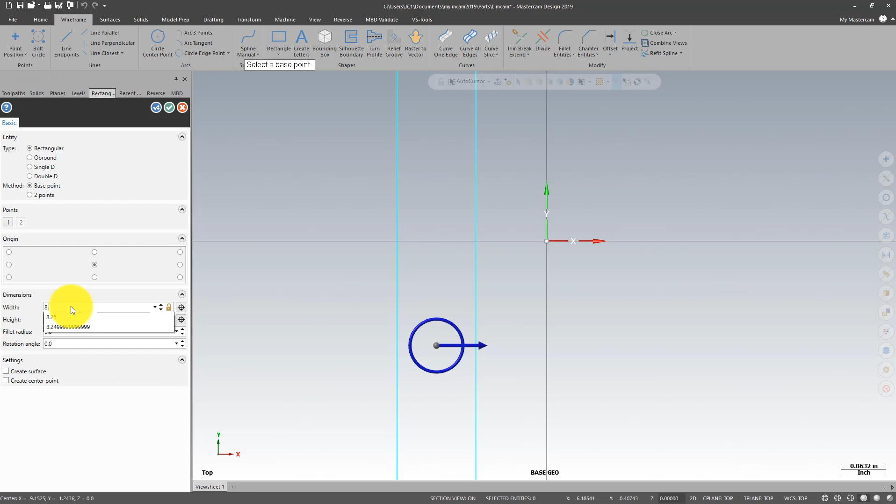So I'm gonna start my geometry on a top plane, and I'm gonna create a rectangle. So wireframe, rectangular shape. I want it right on the center, and then the height, I can copy the dimension. Remember, I copy, I'm just gonna paste the dimension here, and then this one right here would be 8.250. Just grab it, put it in the center. I want this one to have a 3/4 of an inch radius.

I'm gonna pause it right here a little bit. Okay, I'm gonna accept it. But for you guys that don't want to change your configuration to inches, you can go to metric, and I can do the same thing here. Rectangle, same thing, right there. And now the height over here, I'm gonna Control V, and when you get the dimension, just type in IN, and it has to be in lowercase letters, and there it is. So this one right here is 8.250 IN, and Mastercam will do the math for you, so you don't have to change your configuration to inches if you don't want to.

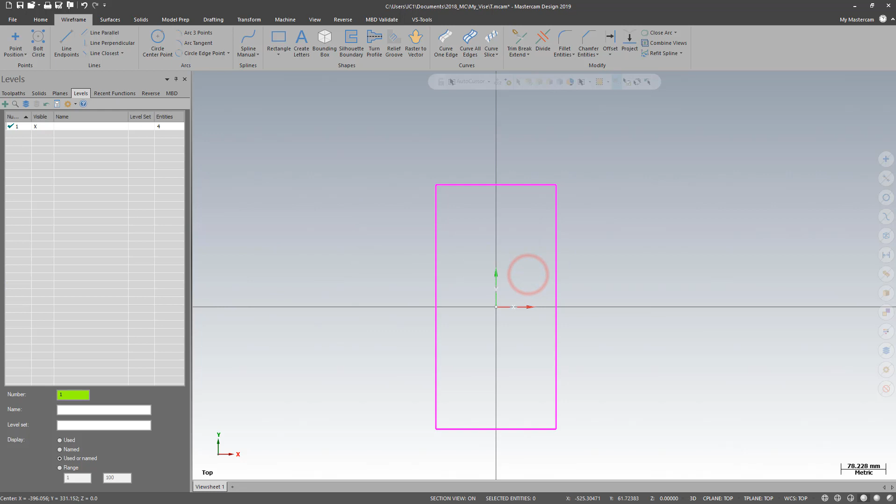The other option that you guys have is you can create your vise in inches and then just bring it and drop it. I have one that I already created. It's a different one. I'm just gonna drop it here. Cancel. I'm just gonna drop it right here, and it asks if I want to scale it, you say no, and it will bring it in. Let's say at the end of the video you create in inches, just bring it into a metric file, and there it is. You say yes, and there it is.

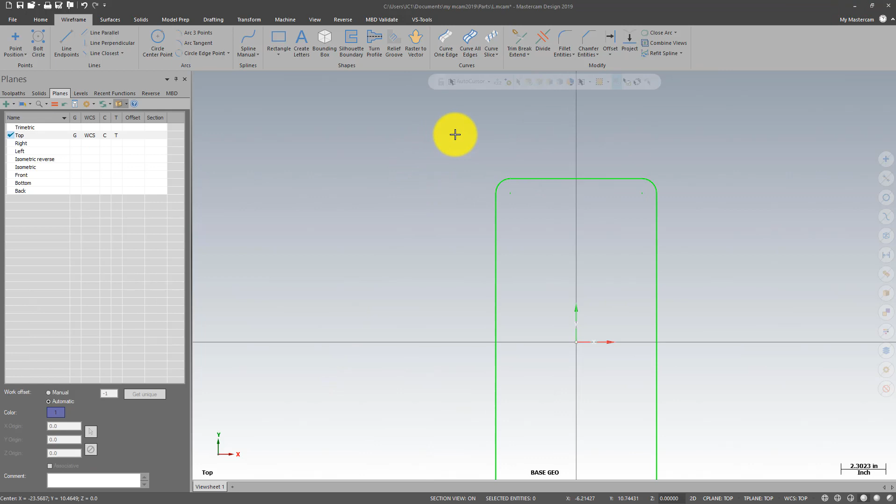So let's go back to our file right here. We already created a rectangle, and this is gonna be our base. So I'm gonna go to levels, and I'm gonna create the first solid. So I go to solid, extrude, doesn't matter where you pick. Just make sure the arrow is going up, and I'm gonna go here with 1/2 inch up. I will say yes. See? Okay, so I'm missing something. I did it on purpose, so you can see that you can make changes to the geometry. You don't have to redo the solid.

So here's the levels. I'm going back to base geometry. I'm gonna turn everything off. I'm gonna be doing a lot of geometry from this dimension, which is dimension T. So I'm just gonna copy. I'm gonna offset this one. So transform, offset entity. I want this one, and the distance will be paste, which is dimension T. Right there. There it is.

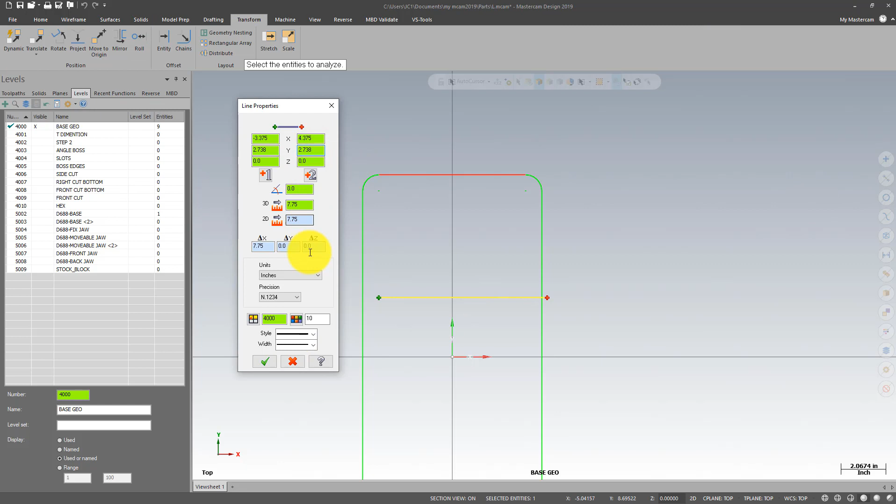What I'm gonna do now is change the properties on this one with F4 right here. This one right here is 8.750 divided by 2. Then I want to change the style to this, just for video purposes. And I'm going to change the color too. I'm going to clear, and there it is.

Well, also on this one, I want to change it to a different level right here. I'm using two monitors. I want that one. Using two monitors, so the box appears on the other monitor. So we're fine right now.

Now what I'm gonna do is, still on that level, we're gonna create a line from this point, and then type in L, and this is gonna be the length. The total length of the line is 0.938 divided by 2, because I'm just gonna do half, and then I'm gonna mirror. And then here I want another line. Type in A for an angle. The angle is 110. The length, it doesn't matter. So it could be 1 inch. It doesn't matter. You just need to cross that line right there.

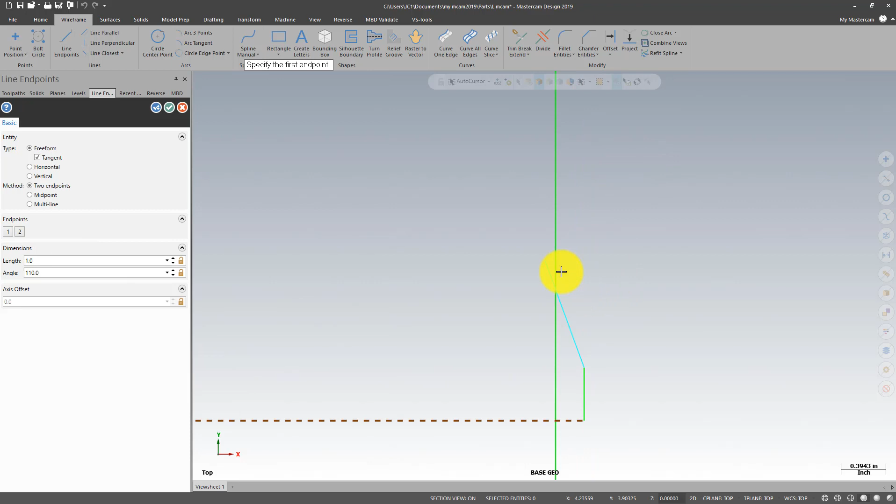So I say yes. And I want to do a transform, mirror. I want to mirror those two lines. And then here, I don't want it on X because X is right here. So I'm going to use a vector, and I'm going to pick up this vector. Now that I'm here, I'm going to mirror to the other side. I say yes. I pick up all of them. Now I want it on the Y, and there it is.

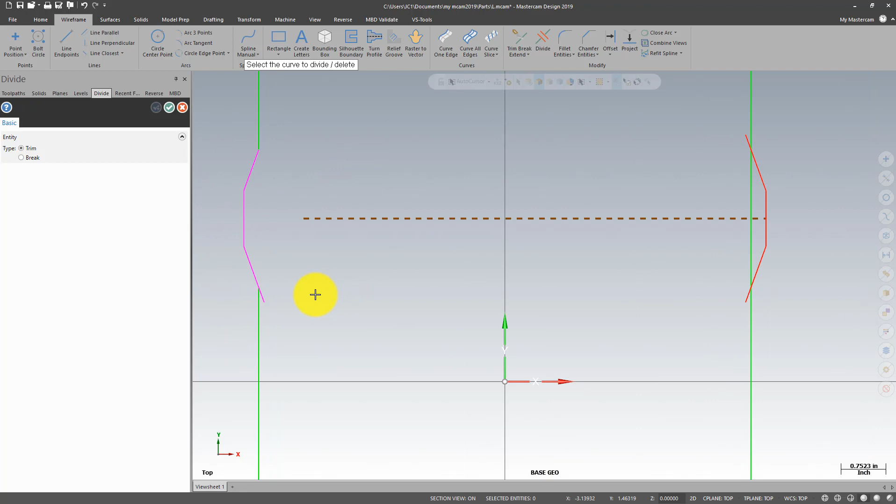From here, what we need to do is trim this. So we will wireframe, divide. Make sure you pick up the right stuff, because if you make a mistake, you pick up the line right there. So here, here, here, and here. So we don't have to rechange the solid. We go to solid, and we clear the dirty solid, and it's there, levels and base, and we're in business right there.

So what I'm going to do now is I'm going to change the color with an F4. Change the color of that to this one. Doesn't matter which color you pick. I want that color right there. So we're going to go to step number 2. We're going to change the level where I want to create my geometry. And you don't have to worry about the dimension, just coordinate of a point, and I want my geometry to be on top of this surface. So right there, it changed to a half an inch, and we're going to create another rectangle.

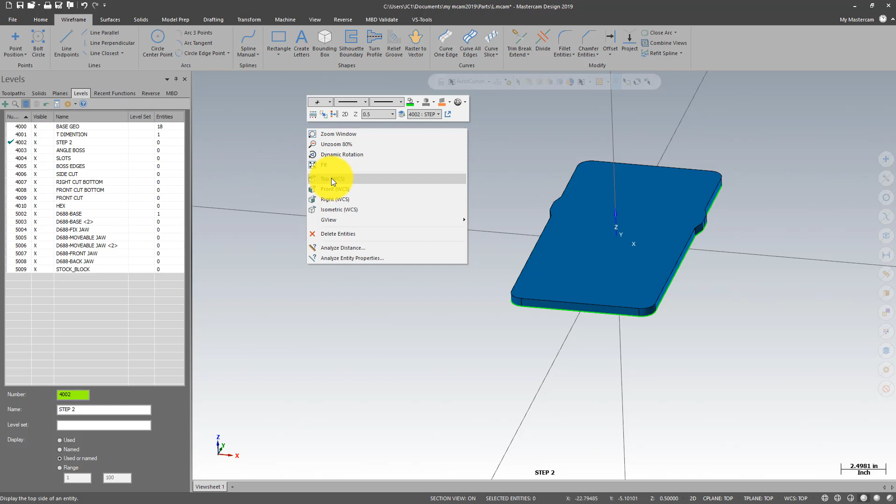So we go to view and then top view. We turn off all the levels. We only have that one on. We can change the color too if we want to. Let's go to blue. It doesn't matter, just to make the video a little bit easier to understand. So I want to create another rectangle, so I go rectangle shapes.

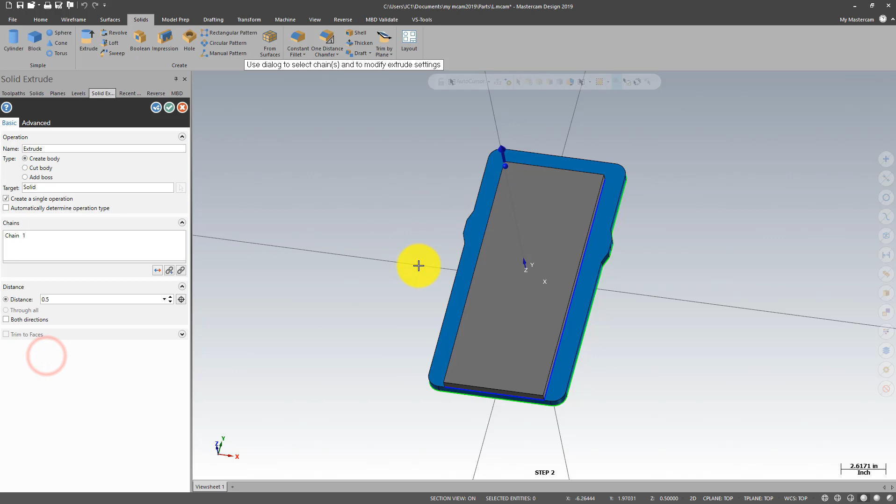See, on top of that, we go to solids, extrude the rectangle, and the length, it'll be 2 inches, 375. Accept that. What I'm gonna do is I'm gonna have both solids together. So we're gonna do Boolean Operation. What these red rectangles are telling you is you have to pick up the geometry. So as a target body, we're gonna use this one, and then the tool bodies, the ones that you want to add, is this. We say yes.

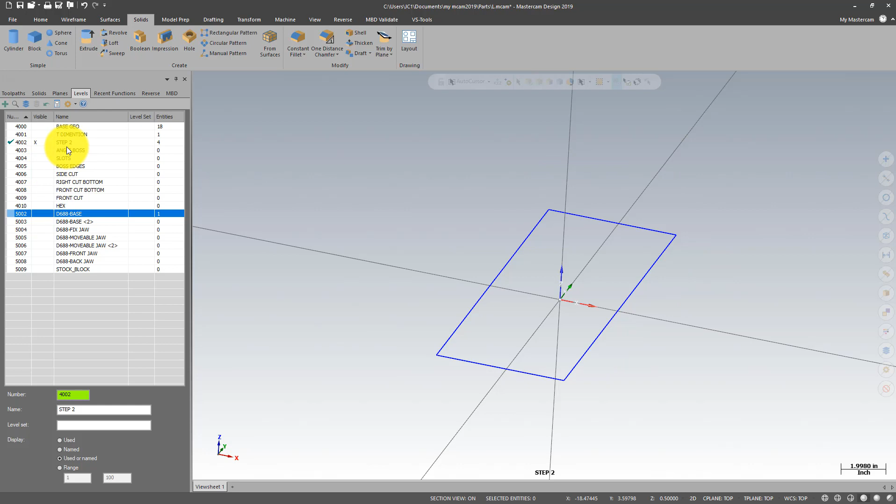See how everything is blue? I will say yes, and we can turn this one off. So even though we did the solid on this level, just change all the attributes to the other level. So we're fine right now. So now let's go to the next step. So we're gonna pick up the next level.

We can go here, top, and we're gonna do what we did on the other one, but this time just the angle is a little bit different. So wireframe, line from the middle here, there, and then we want an angle. So we can go to levels, turn the solid off, and then go back to the line. The angle is going to be 135, and the length, it doesn't matter.

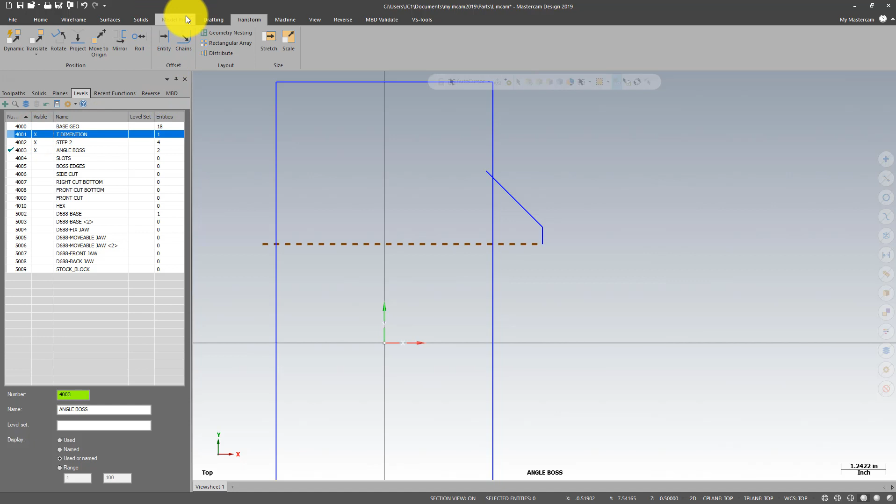So what we're going to do is same thing, transform and mirror. We need this one on, so we can use it as a vector. Mirror this and this, and we want to use a vector, that one right there. Wireframe, and then put them together. But we can trim it and use this, but it doesn't matter. Now we're gonna go back to transform and then mirror. And now we want this one right here.

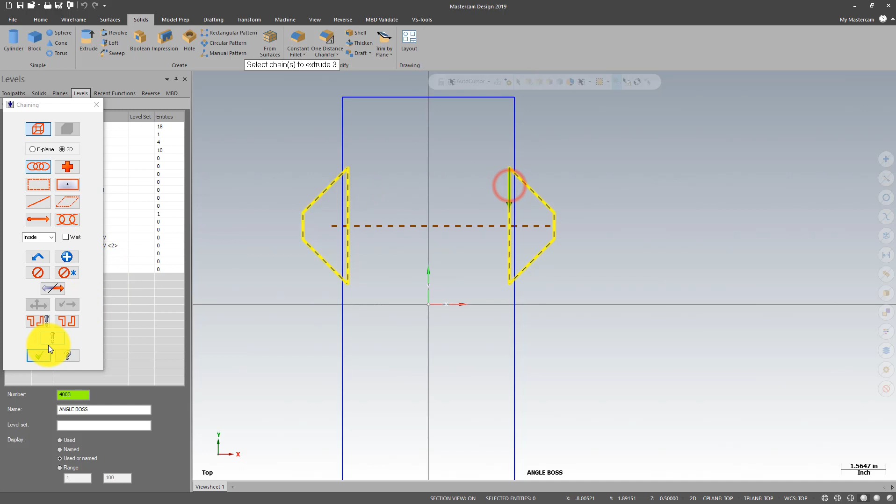We go to solids and extrude the solids. Doesn't matter where you pick. Just make sure your line is going up, and then only 1/4 of an inch up. We accept that, and then we can turn on the base. Sorry, the base right there. So we have them right here. So we do the same. Put them together, the target body, that one, and then this one, put them together so they pick up. If we turn it off right there, clear, and then the base right there.

Now I want to go to the next step, and next step still in the same place, but we're going to create the slots. So we can go here, top. We need this one right here. Let me bring the table. So I need this dimension S and U.

Copy. And then the U dimension is going to be 656. So what I'm going to do here is create a wireframe circle, doesn't matter where. I'm gonna do a different way.

F4, and then the X is gonna be paste, or we just paste it. The Y is gonna be the coordinate of a point right there, and then the diameter will be 0.656. That was the U dimension. Should be right there. What we need to do is just create lines.

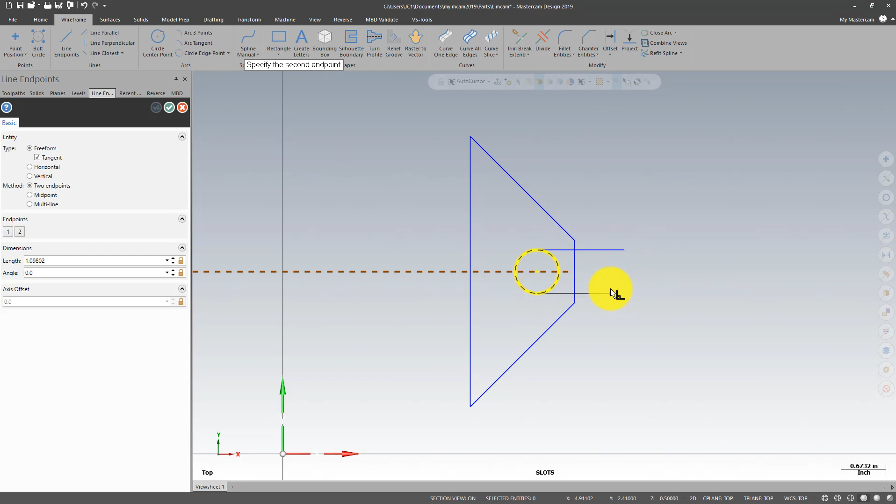Straight lines, just doesn't matter where. You go here, here, divide, just grab the mouse, don't let it go, and automatically we'll do it. Oh, I forgot, sorry about that. We need to trim those two. Say okay, and we're in business.

So now what we need to do is this geometry here with the list, and then transform and mirror to the other side, because it already knows that it's on a Y. We're fine. In order for us, now what we need to do is cut the solid. But in order for you to cut the solid, it has to be visible. If not, it won't do it.

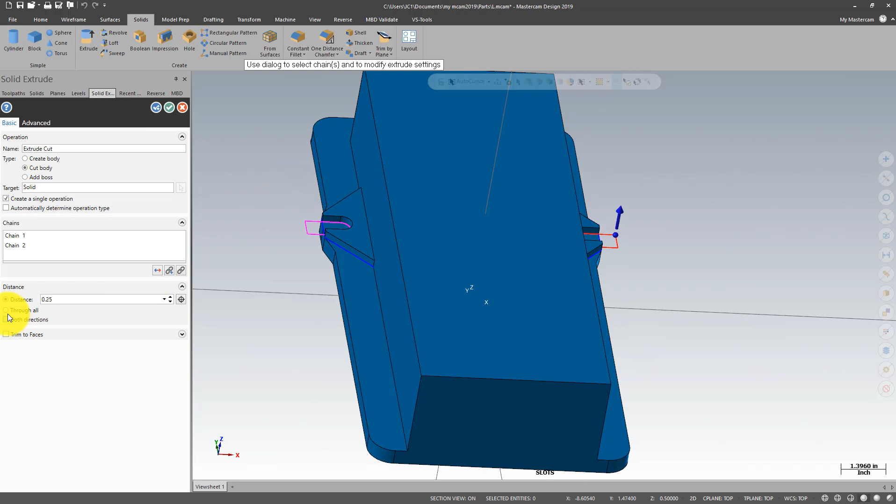And then we'll go solids, extrude, pick up that one and the other one. See, it's creating a solid, but we don't want that. We want to cut the solid. And now I want to do through all, and I want to do in both directions. See right there? So we select yes, isometric view, and we're making progress.

So we're gonna go to the next step, wireframe, and then curve one edge, and go here, here, and here. Doesn't matter which the order, you can pick up any. So we're in business right there. And I'm gonna isometric view again.

And create the lines here too. I forgot about these ones. See right now, because I'm on 2D, it created the lines right here. So what I'm gonna do is Control Z, right there. We can go to 3D real quick.

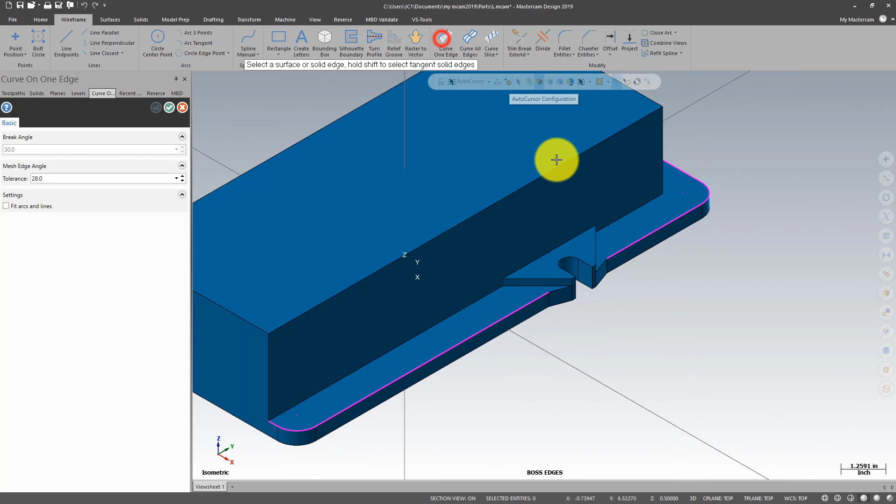And we go here, here, and here, and we do the same thing here, isometric view again. So what I'm gonna do now is trim those right there. So what I'm gonna do is go back to 2D. I'm gonna turn on this one.

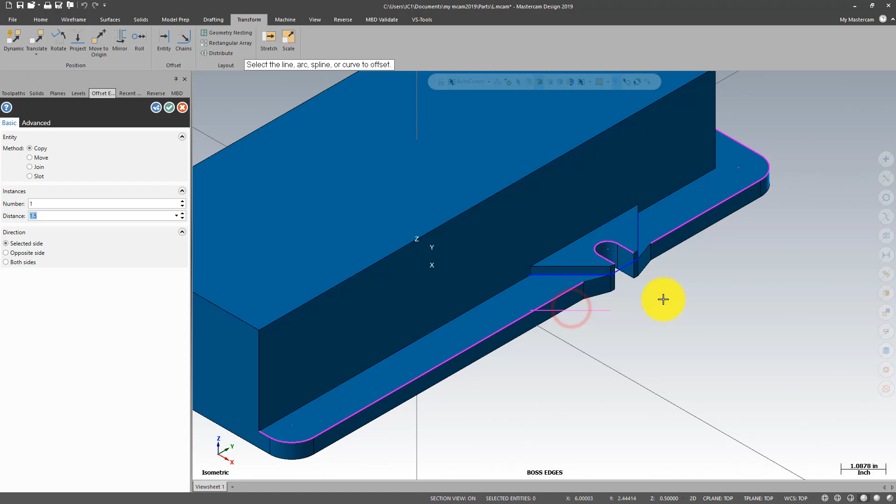I'm gonna do a transform, and then I'm gonna offset. The offset distance is 1.5 inches. Pick up that, we're fine. And then we have this one and this, and then we have this and that.

So we're fine. We can turn off this one right here. Go to the top. We can also turn off that one. Alright, sorry, we have to trim these lines right here. So wireframe, delete.

And then delete those lines. We don't need them anymore. You can delete it or blank it, or I'm just gonna delete them. We can blank them if we want to. Okay, so turn on the base solid again, and we're gonna create solids on those lines right here.

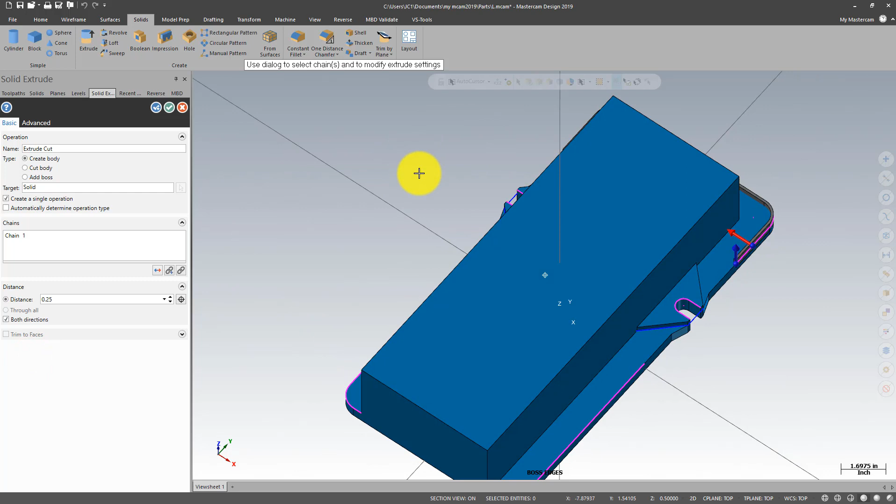So we go to solid, extrude, select only that. We're gonna do the whole thing, but we can add it later. See those lines right here? One is going up, the other one is inside. If they're going inside, I mean, if this one goes outside or down, you have to switch.

So right here I want 250. I don't want both directions, just one direction, 250. And then create body. Then we'll go to advanced, and we have direction 1 and direction 2. I don't want direction 2 because it's pointing out. I want direction 1, and I want it to be 250.

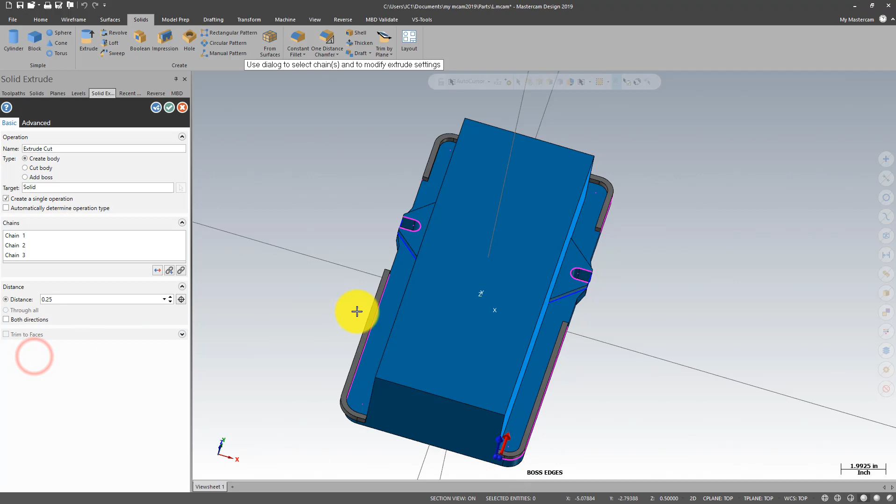So there it is. Then we'll go back to basic, and we're gonna add more, change. We change that one and add chain, and we change that one. So see how this one is inside and this one is to the outside. What we're gonna do is delete that one, or remove, and then add a chain, go from this side, and it will do it. It'll be easier than changing this and that.

So we're fine. Now what we're gonna do is add those to the solid. So same thing, the main is this, and then the body that I want is that, and that one right there. So we're fine.

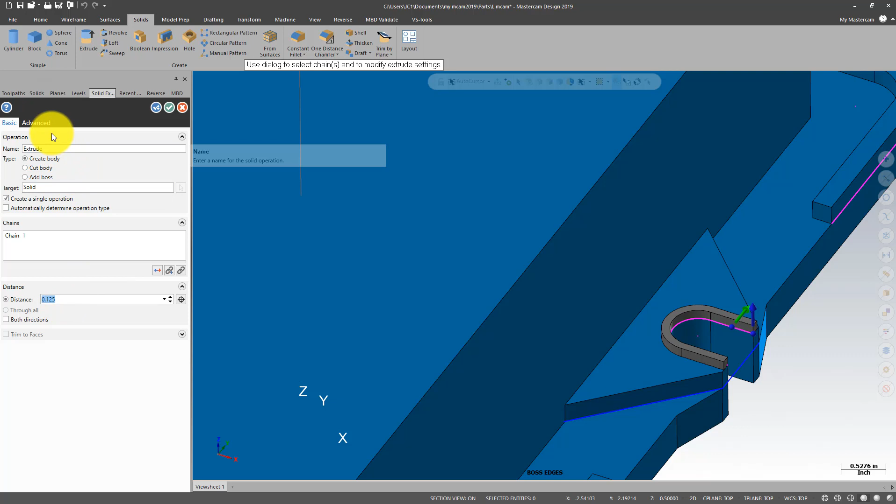So now what we're gonna do is create a solid on this one, extrude, pick up that. The arrow is out and this one is up, 125. We go to advanced, and direction 2, we want it up 0.125 also. We go to basic, we say yes, and then we go to the other side and we do the same thing.

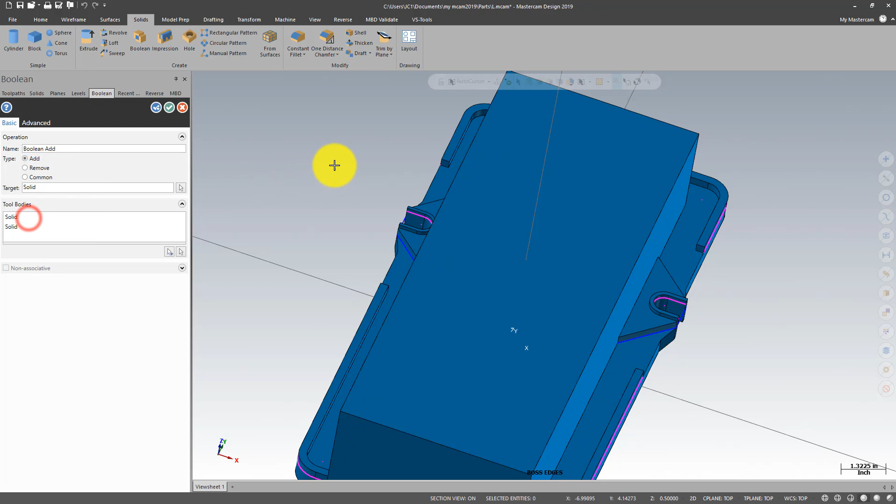The direction is from, well, we're going to go to advanced and then direction 1, and that's what I want. We're in business. So now same thing, we're going to put them together. Here we pick up the solid, and then here pick up that, and they change the color and everything.

I'm going to go to the next step, and I'm going to make a cut right here, so side cut right here. What I'm going to do is turn off the solid. I'm going to change my color just to make the video more fun.

Also, I'm going to change my plane. I'm going to be working on the right plane. And then select view and go to top. Right here, I want my Z to be 0. I'm going to create the geometry right on the center of the plane.

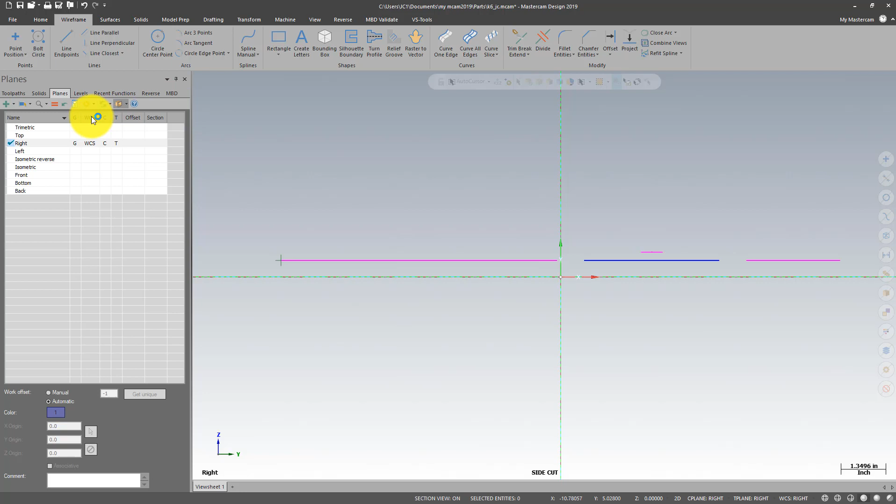So what I'm going to do here is something different. I know that the dimension from here to here is 1.5, but because I don't know exactly and I don't want to do the math, I just go here, create a point right there. I can go to levels and turn everything off.

Right here. So what I'm going to do is transform and translate my point right here 1.5 inches. I select yes, and there it is.

I'm going to create a rectangle, wireframe, rectangular shapes. I want to go right there, here on this corner, and then the width will be 3 inches, and the height will be 3/4 of an inch, 750, right there. I'm going to create fillet, trim edges, half an inch, and...

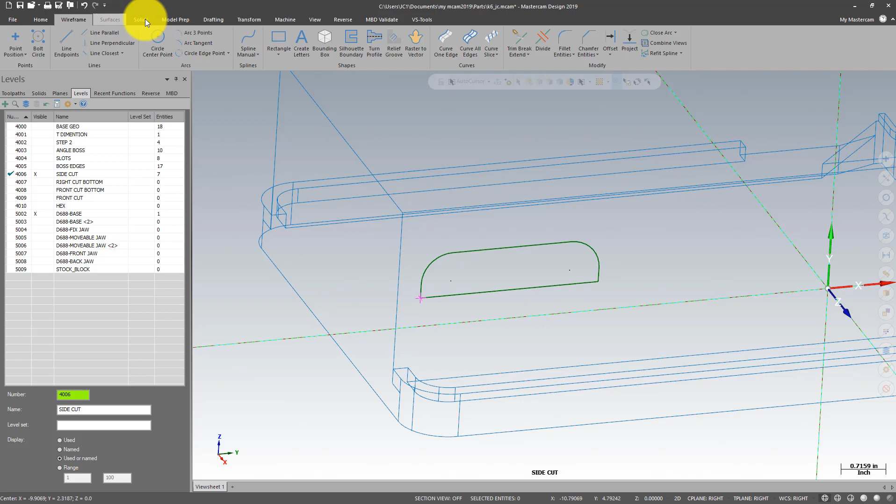We're in business. So now I'm going to cut the solid. In order for me to cut the solid, I had to turn it on, otherwise I won't do it. I'm going to do translucent or in solid, extrude, pick up that, doesn't matter which direction. The distance will be 3 inches. If I go through all, it will cut into this, and I don't want to do that. So it's just distance of 3 inches. Could be a little bit more than 3 inches, no problem. Go to both directions, and there it is.

So we select yes. Now that I'm right here on the right plane, we go to top, and I'm going to make a little cut here. So what I can do is turn this one on.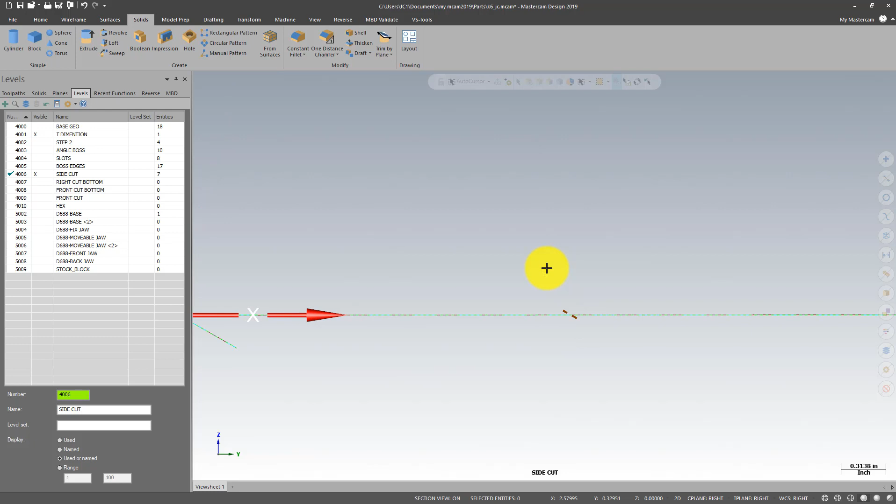So now make sure you're still on Z0. I'm going to create a rectangle here. I'm going to turn this one off. See, the line is right there. So go to top, the line is right there. Go to wireframe, rectangular shapes, and now it's right here, right there. But I want it here, right in the middle.

So the length right here will be 100, and right here the line is going to be 0.938. Select yes.

So again, I'm going to cut the solid, so I'm going to turn it on. I select this right here, solid, extrude, pick up the geometry, same thing, but now I want to go through all, so it will cut all the way. I select OK.

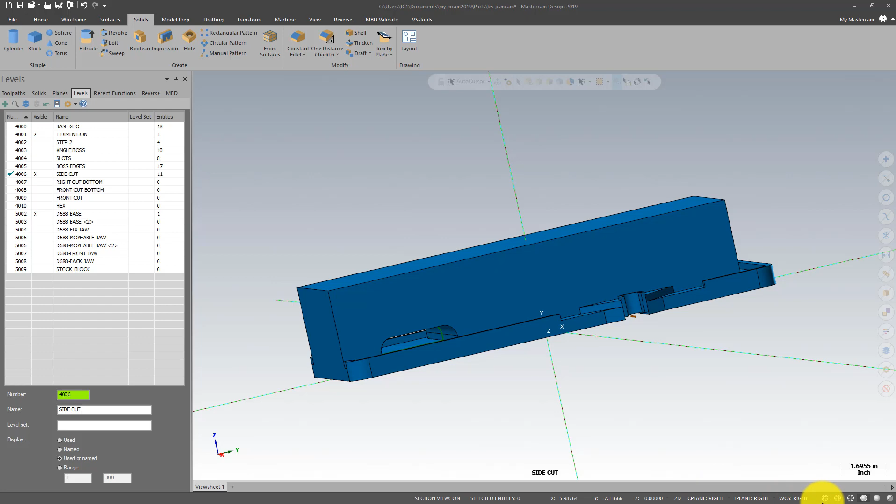What I forgot to do is change the, it doesn't matter, but change the geometry to the other level. So you can go here, pick up the geometry, right click, right here, move, and pick up the next 4007, and I say yes.

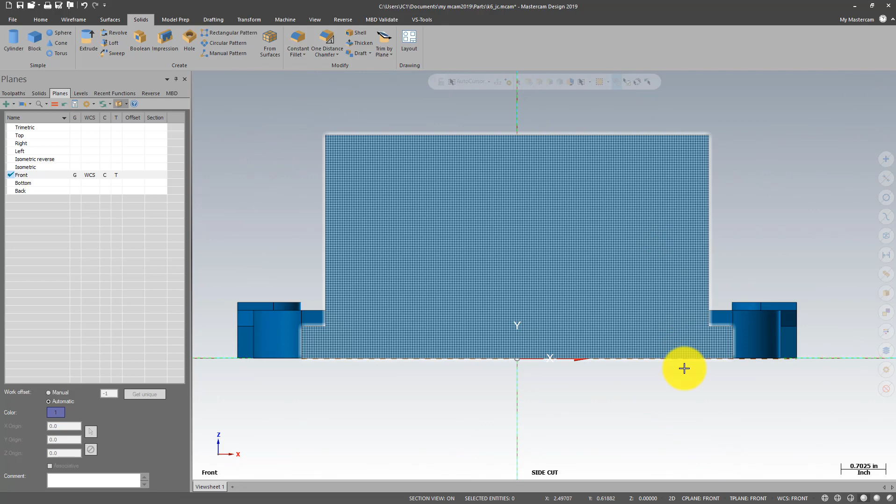Now it's here. Now what I'm going to do is go to the front. I'm going to start making geometry right here. So what I'm going to do is planes, and I'll go to the front plane, and then top. I'm going to do the same thing here.

Levels, we can turn it off, or we can turn it off. So for clarity, I can turn this one off too, because right now I want the center. Go to wireframe, rectangular shapes, and we do the same. It's the same right here. We can lock it, and it's right there, right there. So turn it on again.

Solid, extrude, pick up that, and both directions, and there it is. Okay, so I select yes, isometric view, I mean top view.

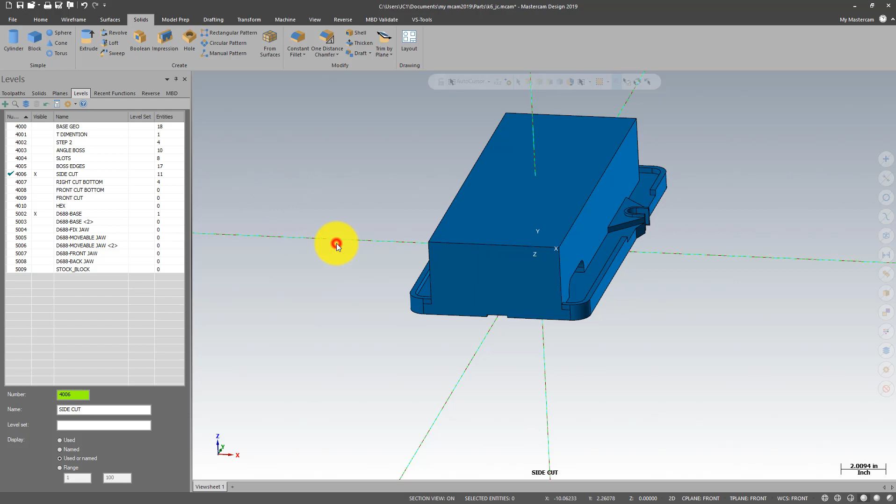So I'm going to make the other cut right here. I forgot to change the level, but that's fine, we'll leave it there. I'm going to go right here. To make the cut right here, what we're going to do is wireframe line.

It'll be from here, but now I don't want it in the center. What I want to do is change my Z, click it, and then right click, Z coordinate of a point. I want my geometry right here on this face, right on the face. I will say yes. I'm going to start with a line right from the center.

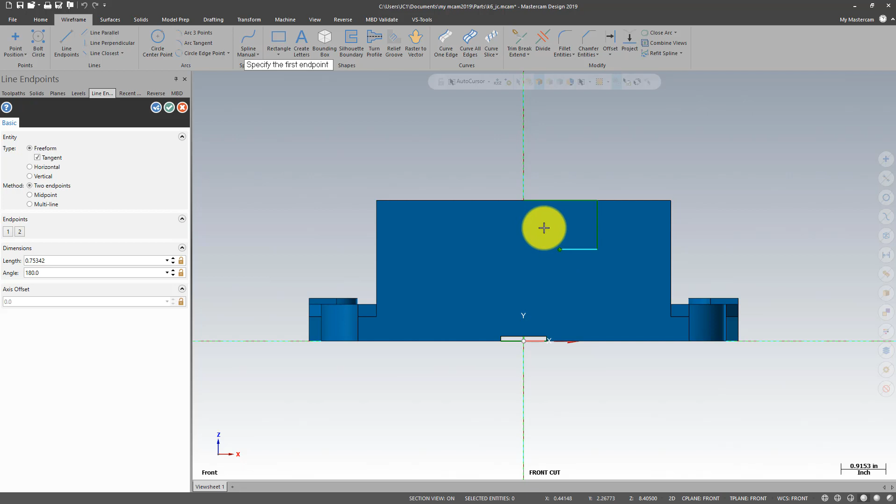The length is going to be 1.5 inches. Then from here to here, the length will be 1 inch. And then from here to here, the length doesn't matter since we're going to trim the line, but it has to be longer than half an inch. So 753, that's fine.

I'm going to mirror the whole thing, but before that I'm going to create a circle. It doesn't matter where, we're going to position the circle with an F4. The X is going to be 0, the Y is going to be 1 inch 540. I'm not bringing the table so I can make the video faster. The Z we don't worry about. The diameter is 2 inches.

Say OK. Now we're going to mirror these lines right here. Transform, mirror, select OK. Now we're going to trim it. Wireframe, divide, just go like this. Don't let it go, make a mistake. Say OK, and then Control Z right there. Divide.

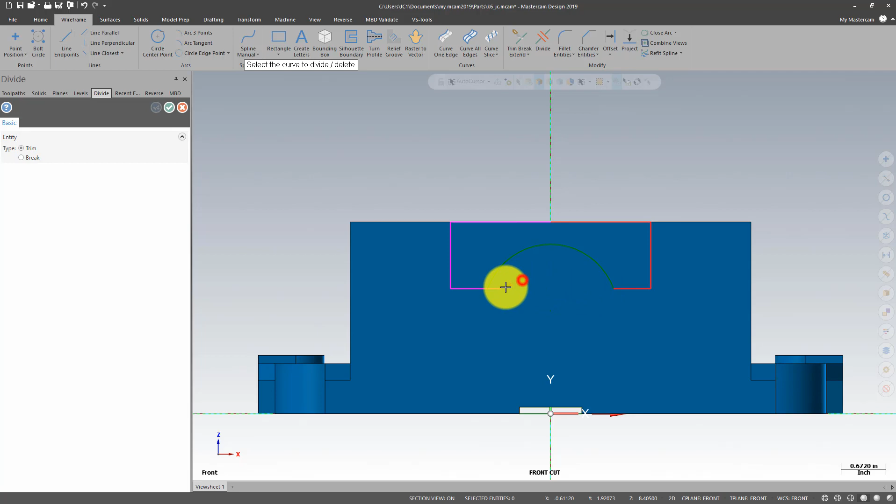OK, now what I'm going to do is cut it right there. So solid, extrude, pick up the geometry. We're going to cut the body. We're going to reverse the direction. The length is going to be that length minus - so I'm going to go to distance, and then length of an entity right here. It cuts all the way through, I don't want that, so I want that minus 1.980. That's what the table says. So I'll say yes.

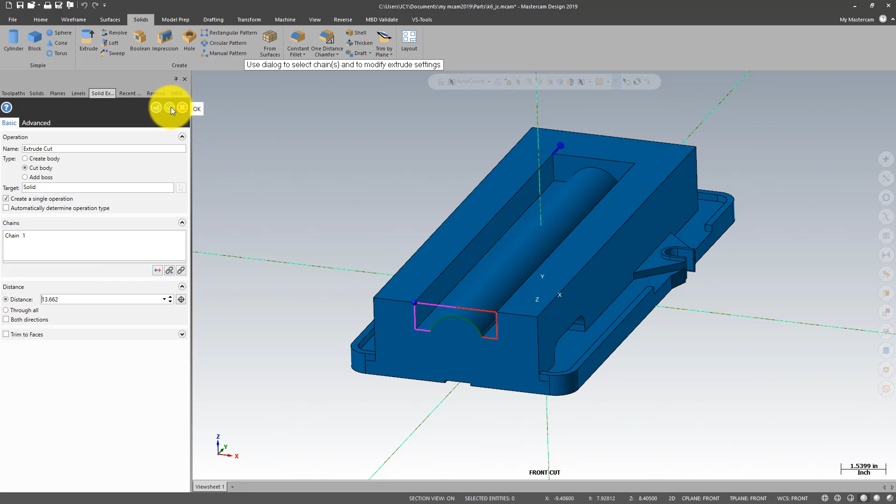Clear colors, you can go to planes. I'm going to go to top, isometric view, and then Control S to save my file. There.

It looks pretty good, but now we forgot to do the hex. Now that we're right there on the front plane, we go to front again, and we'll go to top. Make sure your Z is still right there. If not, just right click and pick up at that point right here. So we're going to go to

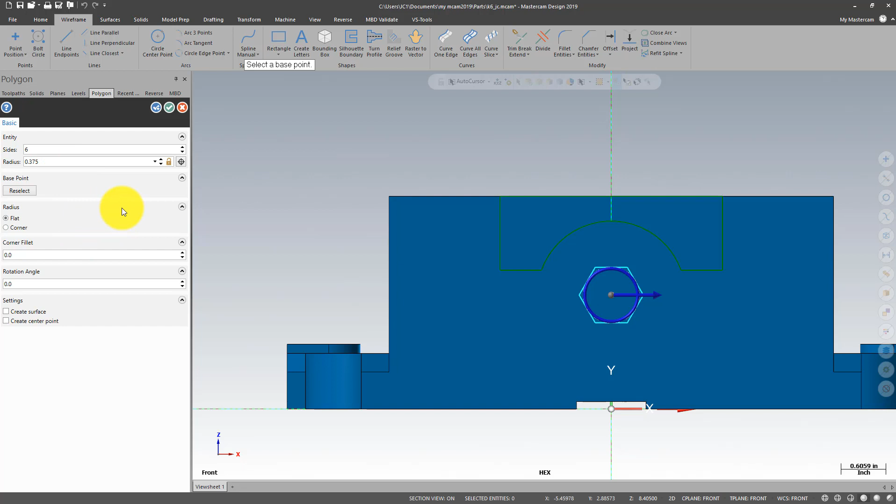levels, hex. So we're going to create the hex right here, pick up the point, and the radius is going to be 375. And we select OK.

And then we can create the solid, extrude. We want to create a body. Change the direction, and the distance is going to be 1 inch 930. That's what we have right there.

I'm going to go here, F4. I'm going to leave it as a different entity. You can go here, change the color. So now what we need, I'm going to go here and change that, change the color just to make it fun.

Now I want to create a cut right here. I don't have the level, so I'm going to go to the next level and name it right cut top.

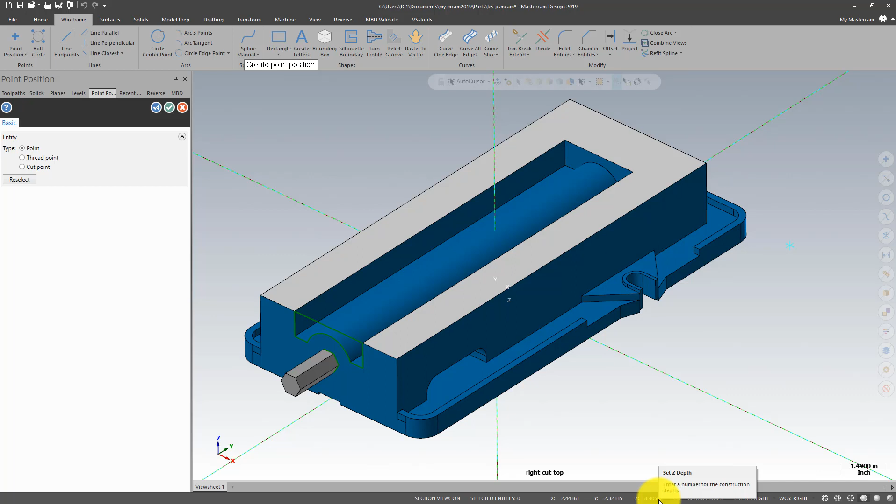That's fine, so I don't know exactly where. So I'm going to go to planes. I'm going to go here, create a point right here. Wireframe, I'm going to change the color. Point, and I want to put it right there. See how the point is right here because my Z is this, I want to tell it to go 0.

And I will say yes. The point is here, I can go F4 and tell it to set my Z to 0. It's right there, I can go to top. It's right here, so I can go to levels and turn this one off. Doesn't matter.

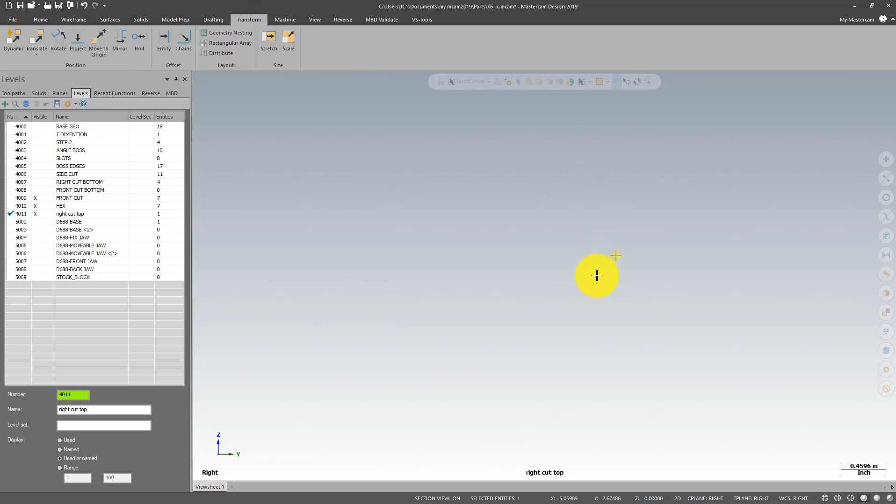Okay, so I'm going to transfer that point to transform, or I can just go to F4 again, and my X I'm going to add plus 375. I'm going to create a rectangular shape. I want to pick that, but now I want this to be my origin. I'm going to unlock that, and this one is going to be 250 by 250, it's going to be square.

I will say yes, I turn on my base. I'm going to go solid, extrude right there, but I'm going to cut the body. I go through all on both directions, and there it is. I will say yes. There it is.

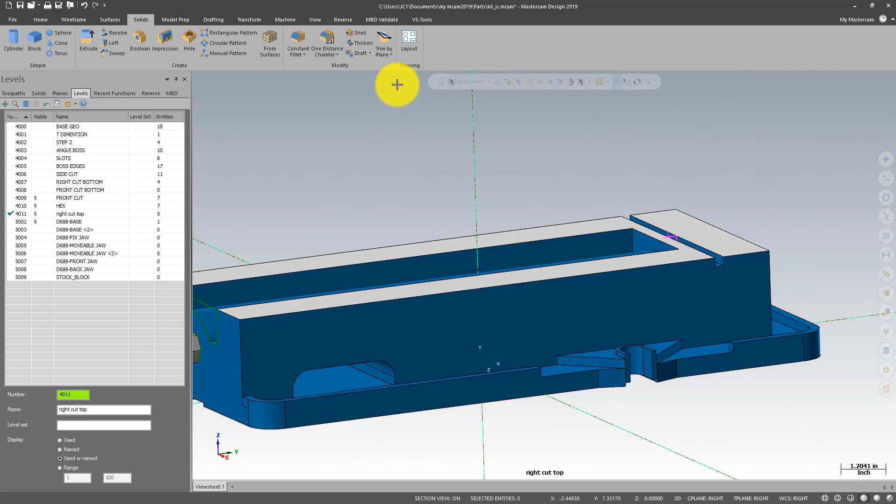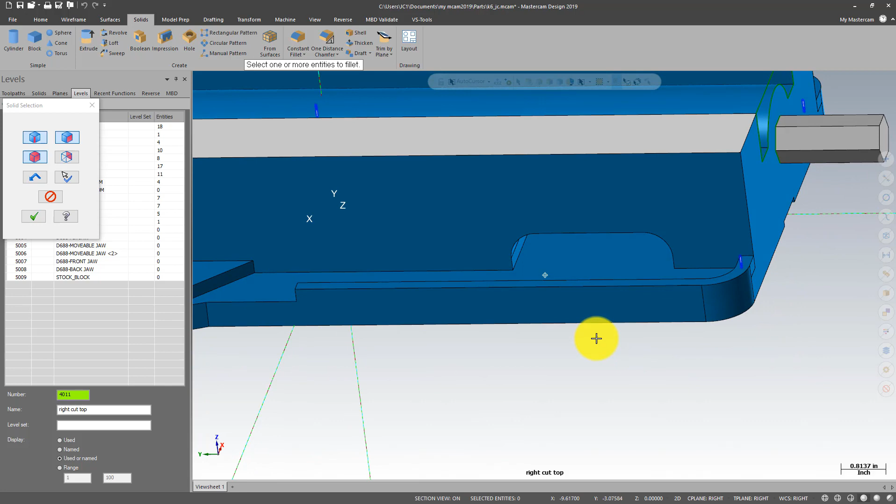Now we're going to go fancy and create the fillets, constant fillet. So pick up that one right there, this one here, and then do the same on the other side. Right there. Select yes, and then the radius is going to be 0.375, 3/8. Select accept.

Now we're going to go on these edges right here, same thing, constant fillet. Now this is a tedious thing, I cannot pick up the whole thing because it will put a radius here and I don't want to do that. So to make the video shorter, go all the way around. I'm going to pause it, select all the edges. Doesn't matter the order that you pick up the edges, you can go in like this, like this, so go all the way around. Do not pick up any of the faces, just pick up the edges.

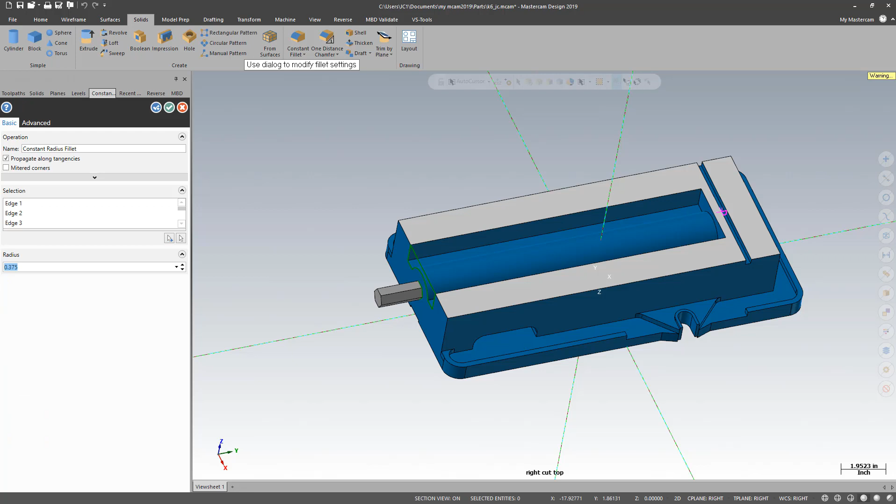It won't work otherwise. So now that we have all the edges - oh, I'm missing one right here. See, that's why I'm saying it's a tedious operation. But we're in business, select OK. Now it says a warning right here because the radius is too big, so we'll change this one to only 125. Select OK, and we got it.

Add more, we can do this.

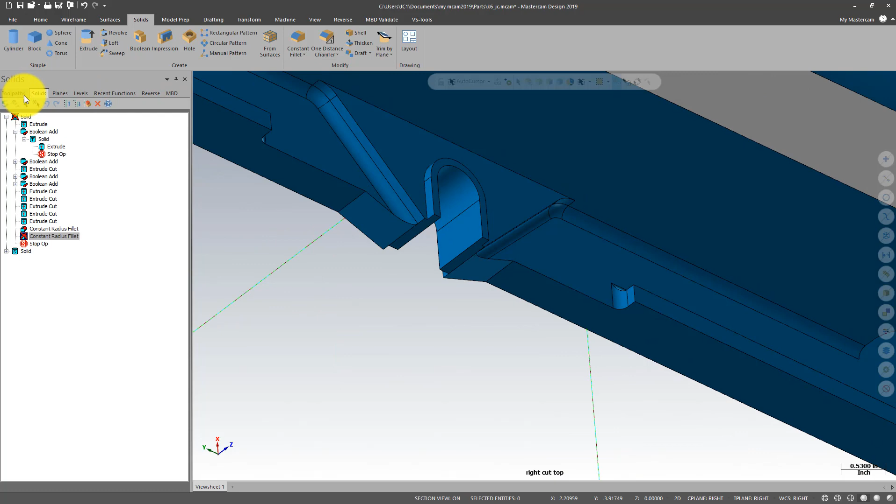See, forgot that. If you forgot one, just go there and add. Do not select here because it will reselect and you will lose everything. You have to do everything again. So add. Right there. Reselect all. And it's right there. Right here.

Isometric view. Sorry. Planes, top, isometric view. Right there. So again, Control S to save my file. So now the base is complete. We can go here, select that, turn everything off. That one right there.

So what we're gonna do is the top now. Now I'm gonna go to the fixed jaw. So I'm gonna go to planes and I'm gonna go to right plane. Top. Let me see, I'm gonna change the color here. Doesn't matter. And I'm gonna go with this one.

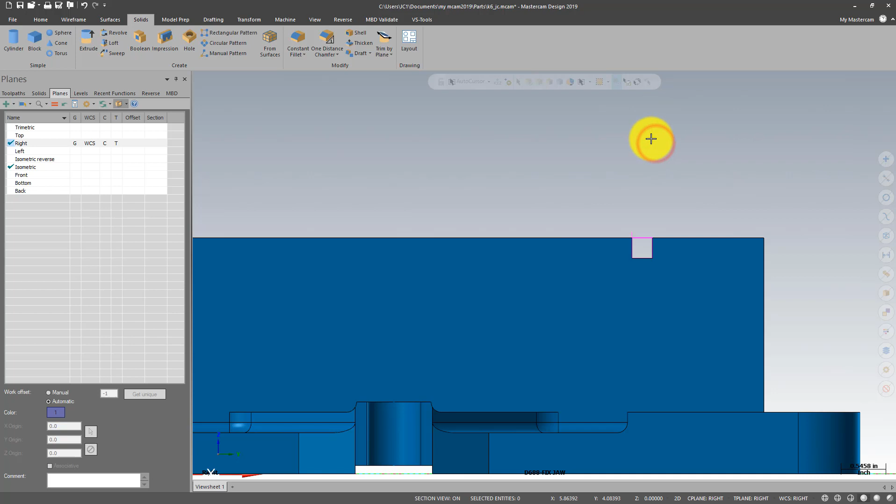So what I'm gonna do is make sure you're in 2D and your Z is at 0. We're gonna go to the middle again. So we're gonna start with wireframe. Let me see, did I change my level? Yes. This one is gonna be easier. Curve, right here, right here. What we can do is turn off the right cut, this one right here.

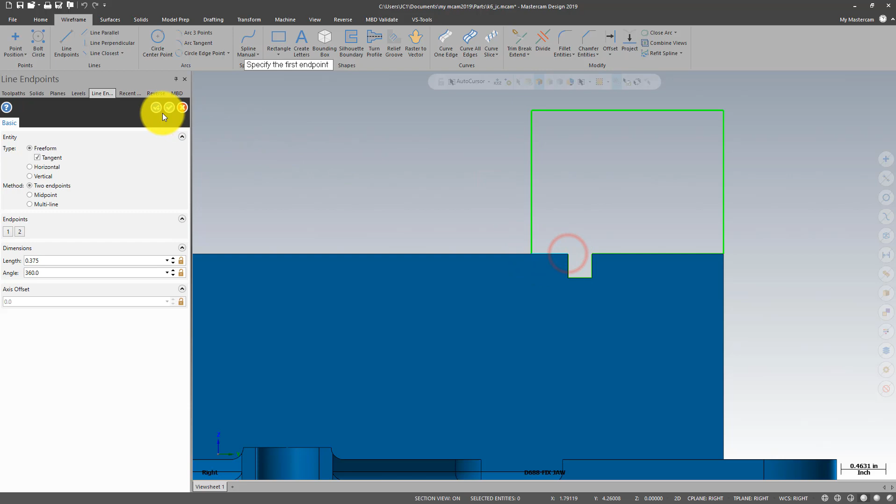What I'm gonna do is create a line here, the length, and it's gonna be 1.485. Now I want a line from here to this direction, L, 1 inch, 0.980. Now I want a line from here to here, and then the length, I have it, 1.485. And then we just close the contour from here to here, and we got it. Scared me for a little bit, but it's there.

We'll go to solid, extrude, and the distance 3 inches. We select OK. F4. I'm gonna change the color. I'm gonna go white. Doesn't matter. Right there.

Now what I'm gonna do is I'm gonna create 2 points to drill the holes. To do that, I need to go to planes, and I'm gonna start on the front. Then my Z, right click and Z coordinate of a point right there. Now wireframe, create point, and I'm gonna go right here.

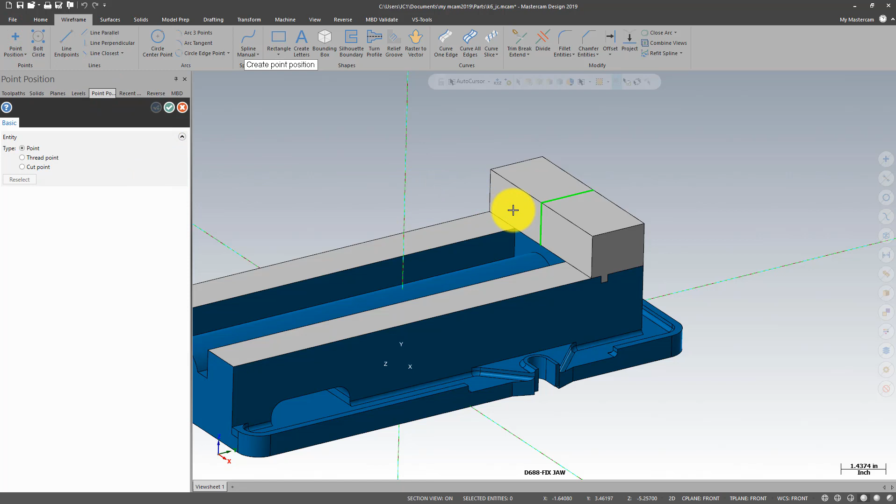I need to go to the table to see the location, so I need N and O. N is 0.940, and O is 8.375. So copy, we go here, F4, paste, divided by 2, it's only one side, doesn't matter which side, and then my Y, I'm gonna leave it there. I'm gonna change my Y here too.

F4, the Y is gonna be Y coordinate of a point right there. See how it changed to that? Then right here, point 940, we're gonna add the 0.940 right there. And we just go to mirror, mirror the point right there. So we add the 2 points. I'll get there in a minute.

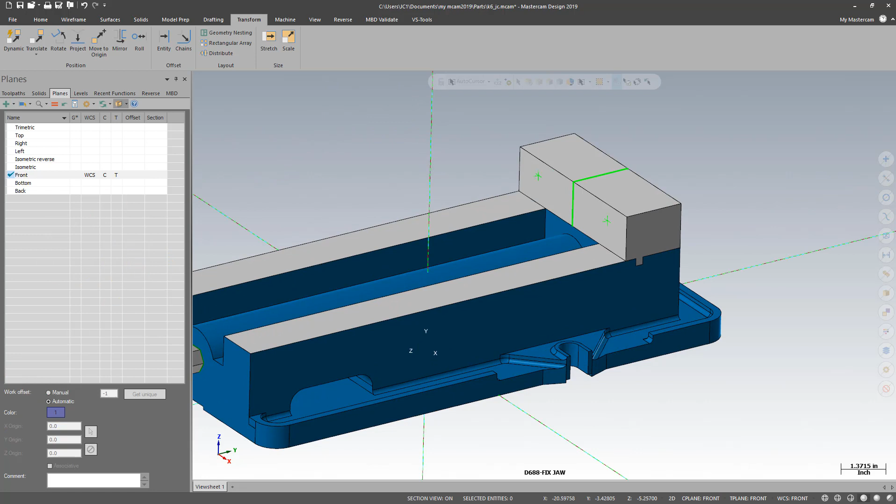Now I'm gonna create a movable jaw. So I'm going here, turn that one off, doesn't matter. And I go to top, and then my Z, I want it to be at 0. I want to create a line from here, and then L for length, and we already have it, 1.485. Then from here to the center, so the length will be 3 inches.

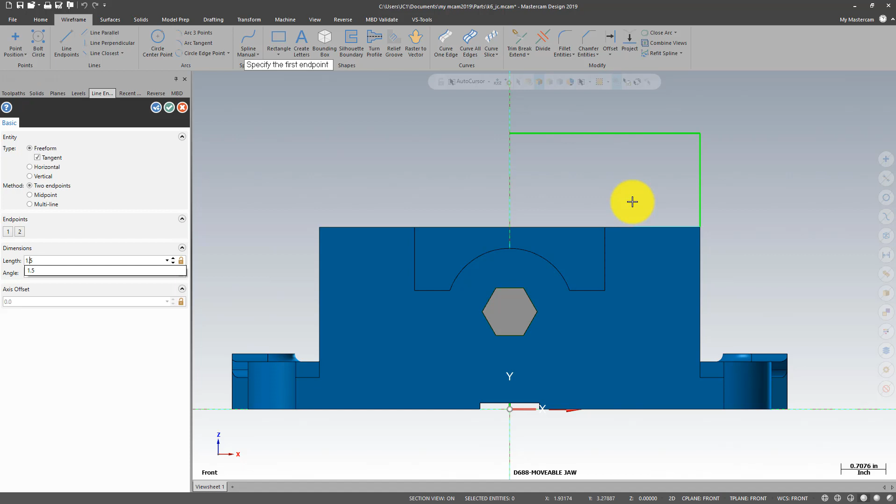I'm gonna mirror again from here in this direction, then the length will be 1.5. Then from here to here, and then the length is gonna be 0.750. We can go to levels, turn off the base, doesn't matter. 0.750, and then we go with a line right there. Select OK. We can turn off the hex too. This one right here, the length will be half an inch.

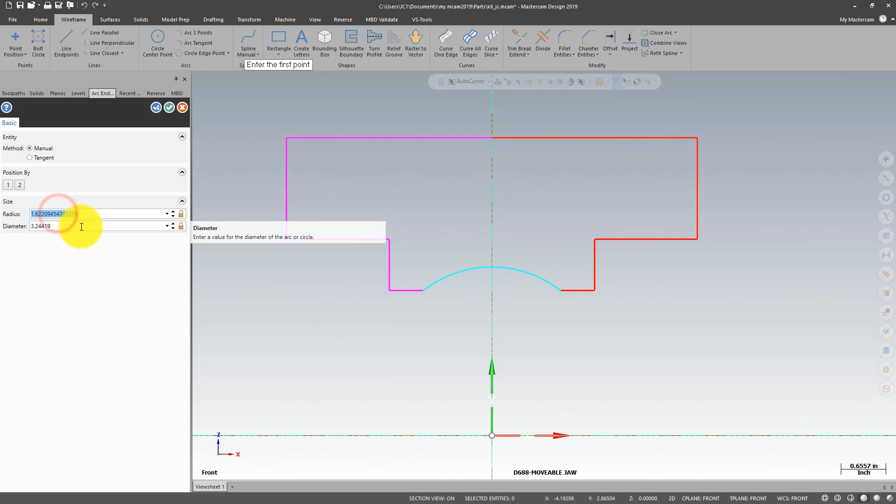And then we just mirror the whole thing. Select the whole thing, transform, mirror right there. Then we go to wireframe, arc endpoints, select 1, 2, and then the radius is going to be 1.250. Select yes. And there we go.

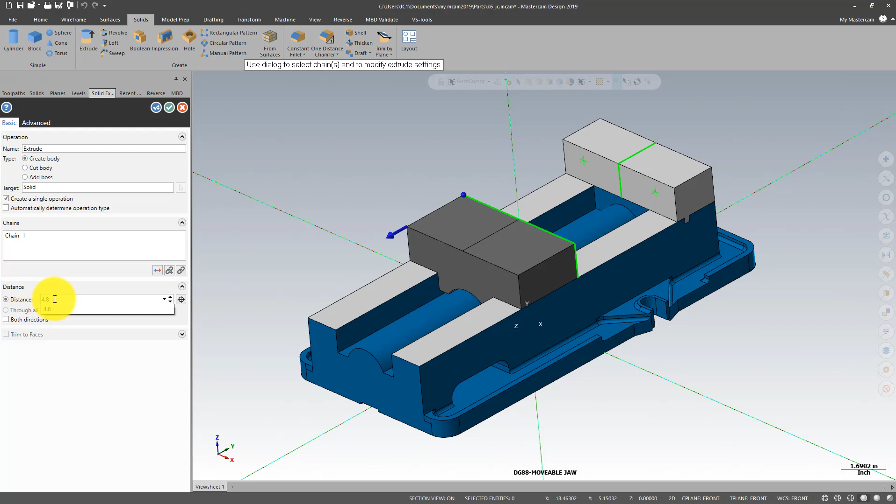Now we're going to create a solid extrude. And then we don't want it on both directions. Let me turn on the levels and the base too. I don't want it on both directions. It could be both, but I'm gonna go to the other direction. Only one direction. That's the direction that I want. I don't want it that way. And then the distance is gonna be 4.5. Select OK. Again, F4.

We can change the color. Select OK. That line right there is cutting. We can fix that real quick. We can go here and delete that one. Delete, F4.

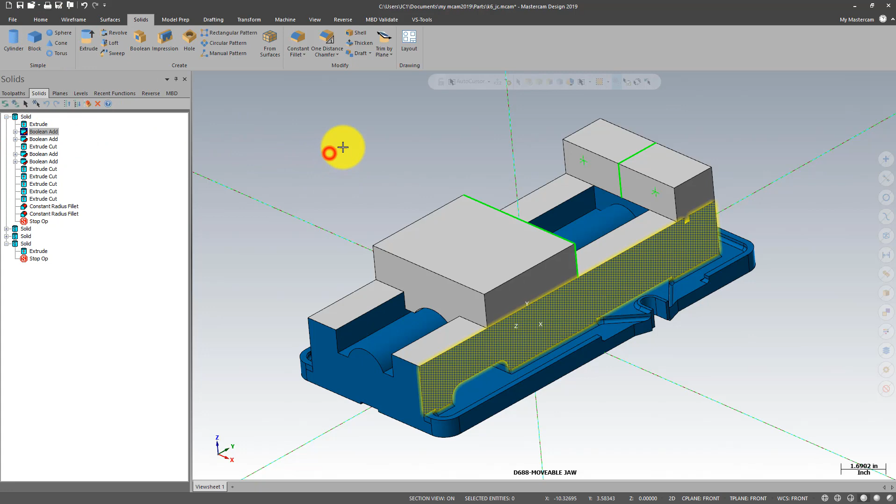See the red dot right here? This is 0. Let's say x coordinate of a point, and we want it right here. Right there. We can go to solid. See, the solid has, we can go here, and there it is. So we got rid of that. The line, we don't want the solid in half. I want a single entity. So again, I'll go Control S to save my file.

Now what I'm going to do is I'm going to translate these points to this face. It could be that face. It doesn't matter because the hole is going to go all the way through. So translate and pick up the 2 points, and then go to vector from to, reselect. I want that point and that point. Because I'm on 2D, it will just move him, but I don't want to move him, I want to copy. There it is.

Now what I'm going to do right now is drill the holes on these locations, and then I'll go to the next body. So in Mastercam 2019, we have an option here to create holes. It's asking me to select the target body. So I'm gonna drill here because I have several bodies open. So I'm gonna select that. See the plane orientation, because I'm working on top right now. I can change this one real quick. I'm gonna select the positions. I'm gonna go here, pick up that one and that, enter. See how the holes are going down because I'm on the top.

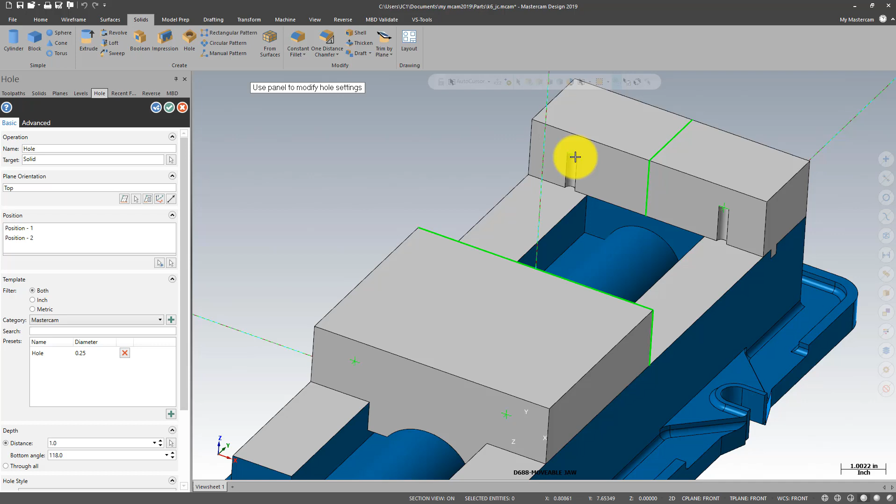I can change the plane here. There's a construction plane. You have a lot of different options. I'm not gonna go there because somebody already has a video about that. What I'm gonna do is select that face right there. So now the holes change the orientation. If you don't see that, it's template. I'm gonna use a template. Mastercam already has all the templates. I wanna go to inch, and here I'm gonna go to tap drills UNC. It's not a fine thread, it's coarse. And I know that those holes are 1/2 inch 13, and there it is.

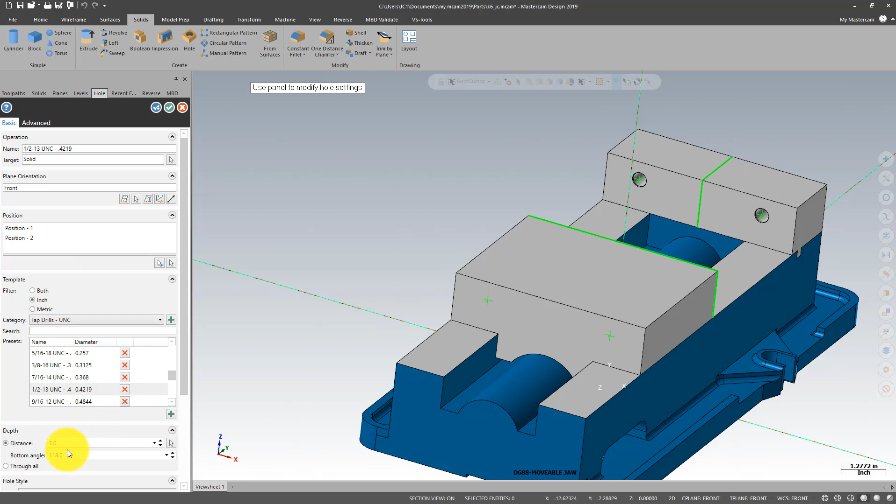Then here the distance, but I want it all the way through, so there it is. They go all the way through. And then you can have a chamfer on the hole if you want to. Right now by default it's 5%. I'm gonna leave it like that, and I'm gonna accept it. I'm gonna say yes.

Now I'm gonna pick up this body, pick up the geometry, enter, and then again I'm gonna use the template, tap drills UNC, 1/2 inch 13, through all, simple drill, chamfer 5%, 45 degrees. I will say yes, and there we go. Again, Control S to save my file. So we're getting pretty close.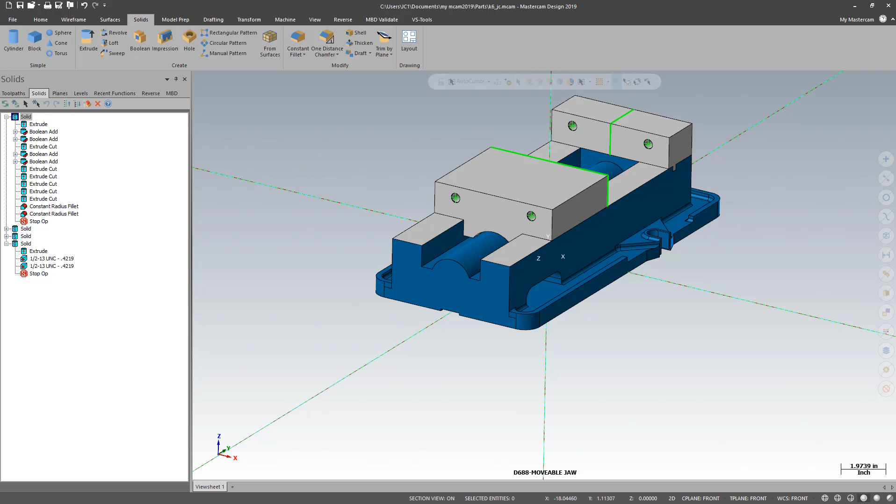What I'm gonna do now is create the jaws. I'm gonna start with that back jaw right there. I can create it right here on the front plane, but just to be different, I'm gonna do it on the right side. Planes, right, top. I want my Z coordinate of a point, right click it, Z coordinate of a point, and pick up any point right there.

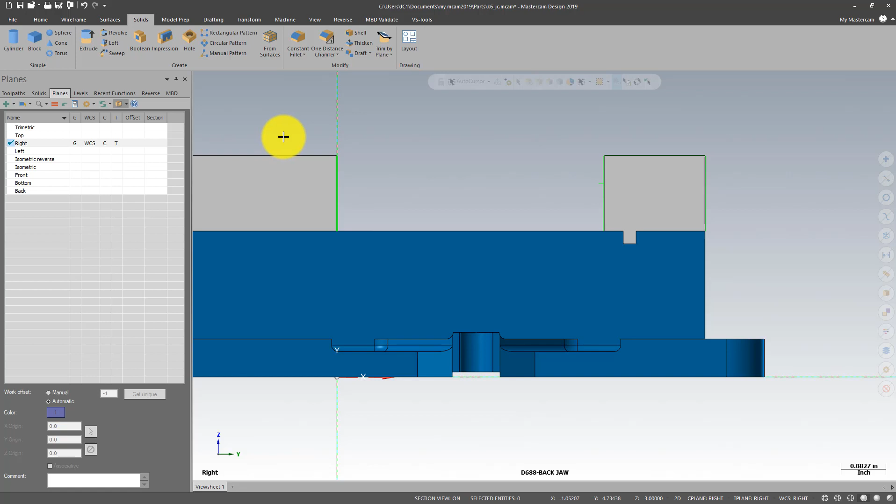So what I'm going to do is create a rectangle. Let's change the color. Wireframe, rectangular shape. I want this corner right here, something like that. Then just give me the dimension 750, 3/4 of an inch. The height is gonna be 1 inch 750. Now fillet radius, I'm just gonna leave it plain like that. I say yes.

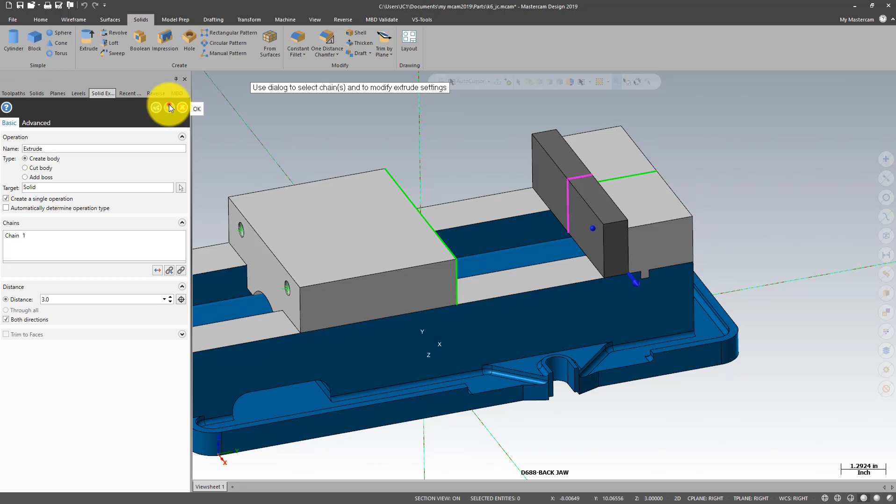All right. So now what I can do is just transform, translate, and on the Z -3 inches, and I want to move it. Well, because we did everything in the middle, I could have just extruded the solid right there. So solid, extrude. I'm gonna go both directions, and it's gonna be 3 inches. There it is. I will say yes. This one and the other one are the same. I'm just gonna transform and copy.

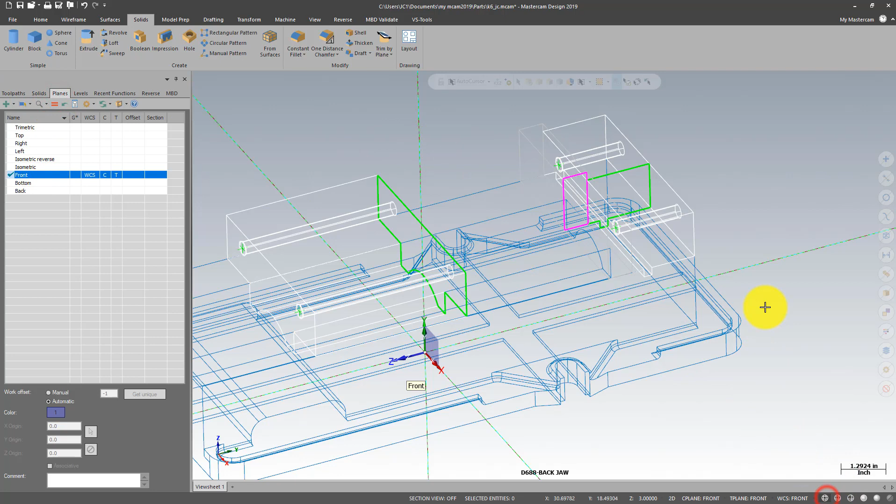Let's change the color on this with an F4. There are different ways to change the colors, but to me it's easier this way, and that way you learn something different. We just change the color right there. Now we need to drill the counterbores on the jaws, and we're going to use the solids as a reference. I go to front, yes, and go here. It's kind of hard to see, so we're going to go to levels, all off, and this one right here, that one right here.

So what I'm going to do is transform those. So transform, translate, pick up the geometry. I will say end of selection, and then turn on this one to make it visual, and the vector is gonna be from here all the way to here. There it is. I don't want to move them, I want to copy, because otherwise the other solid won't work. So now what I can do is turn on all the levels, off.

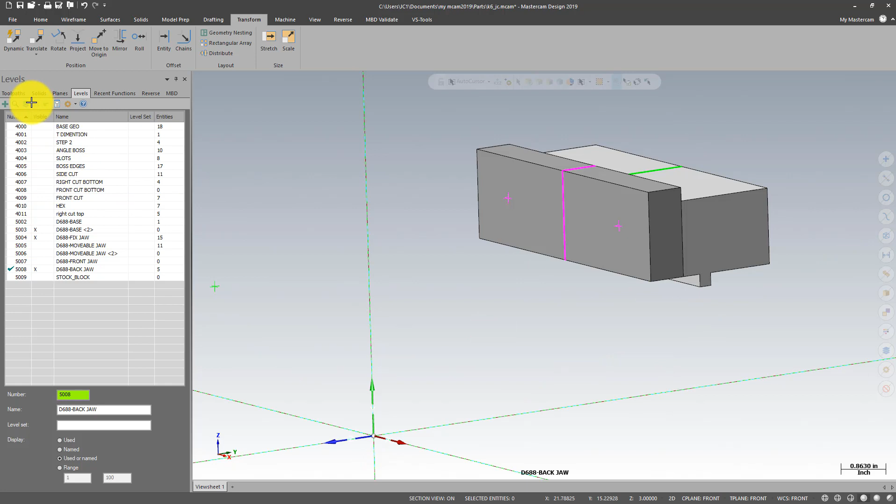Now what I'm going to do is I'm going to select those F4, and I'm going to change the level. Man, 5008. Okay. So we're right here. F4. Change level 5008. You just pick up one at a time. Alright, so we can turn this one off.

Now let's do the counter bores here for these holes. So make sure you're on 3D, because if you're on 2D, the geometry will move over here. So go to 3D, and then solids, hole, pick up the locations, enter. See, we can pick up the face, so they're going that way. What I'm going to do here is I wanted a counter bore. Now we can go to the template.

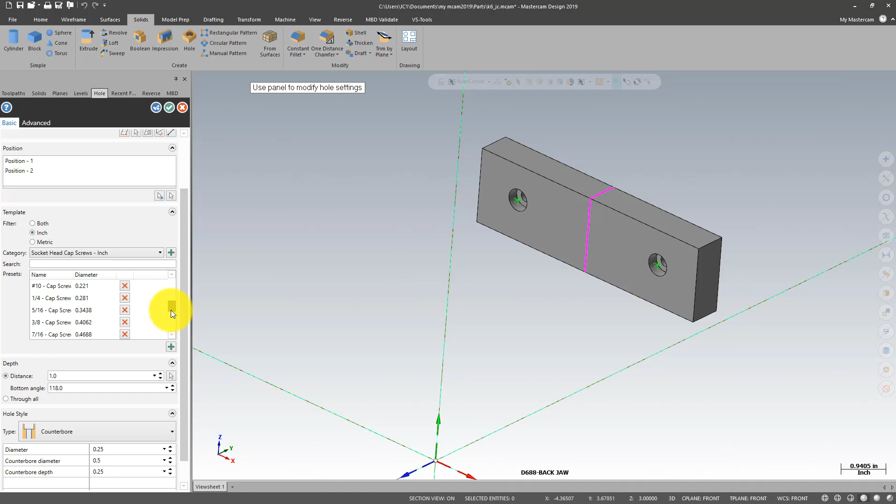Mastercam already had the templates, and I want a socket cap screw. I just want to see the inch, and I want a 1/2 inch 13. There it is. Already picked up everything for me. I want a chamfer 5%. You can have 2%, a smaller chamfer. I select OK, and there you go. So now I can turn almost everything. That one too, and there we go.

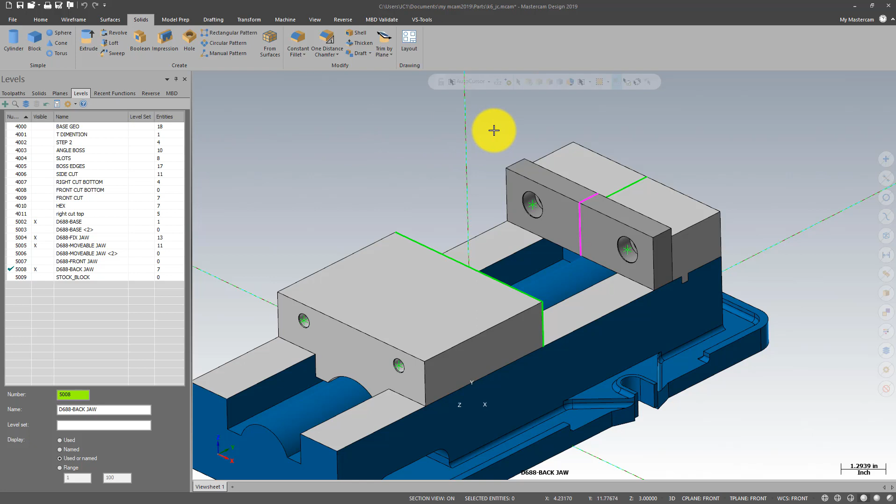The next step is to start importing parts. I'm gonna control and then grab one of the files. It's right there, the bolt right there. Select OK. Now what I'm gonna do, I'm gonna go to model preparation and align this one to the face. This is the face that I want. Destination face, it'll be this one right here, and it's right there. Select OK. We're in business.

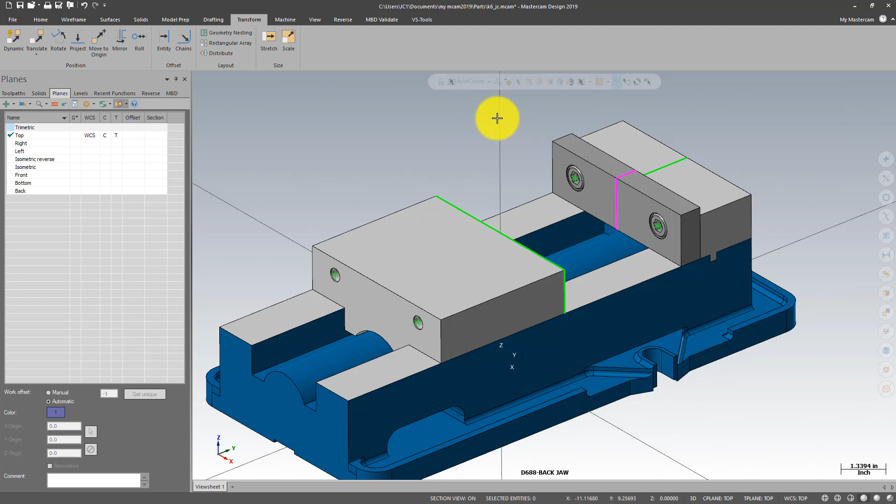Now I'm just gonna translate dynamic, and then from here I want to copy from here to this point. Clear. We're in business right there. Now this one right here, I'm just gonna rotate that, this and this, dynamic. Just gonna put it right here and rotate 180. Oops, I lost track. If you lost track, just type in 180. It's right there. Enter. And then I'm just gonna move it right there. Let's say yes.

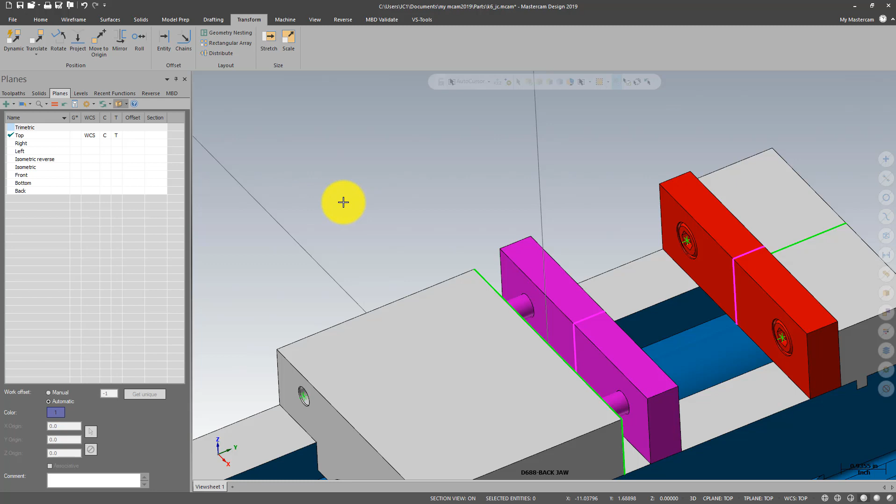And then here, what we can do is clear the, I want to translate this, not that one, that and that one, only that, and then the geometry here automatically will bring it. I will say end selection. I'm going to select the vectors from here to here. The reason I'm doing a translate this way is because I want to change the level.

Go here, and I'm going to change the level to the front jaw, which is going to be 5007, and also I'm going to change the color to that color, just to make it different. I will say yes. That's the reason I'm doing this way. Now it's asking me about that geometry, and I will say yes, and then it disappeared because the level is not on. Now it is. We clear, and we're in business.

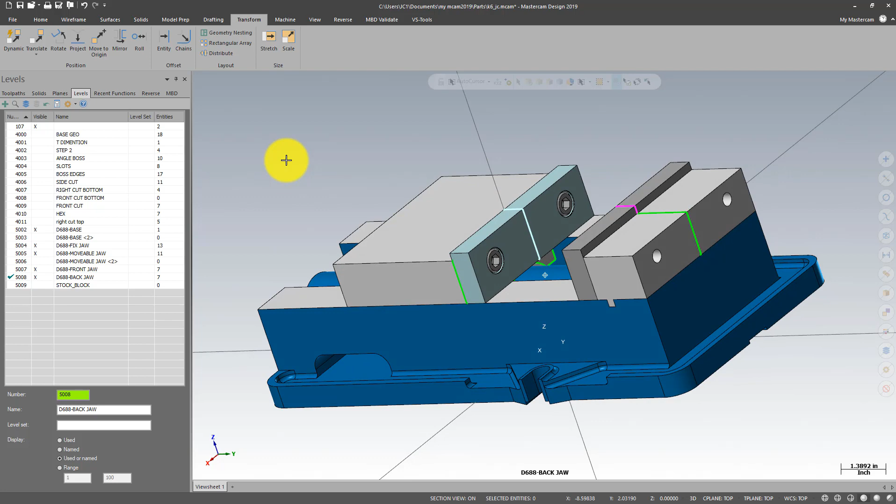Isometric view. We're getting pretty close. As you can see, the hex is not there. I'm gonna do it so it can be in the same. I'm gonna add it. The main solid is there, and then this one is this. So that way it's there. Select yes. So we're in business. From here, you can start bringing stuff in. I'm gonna go Control S to save my file.

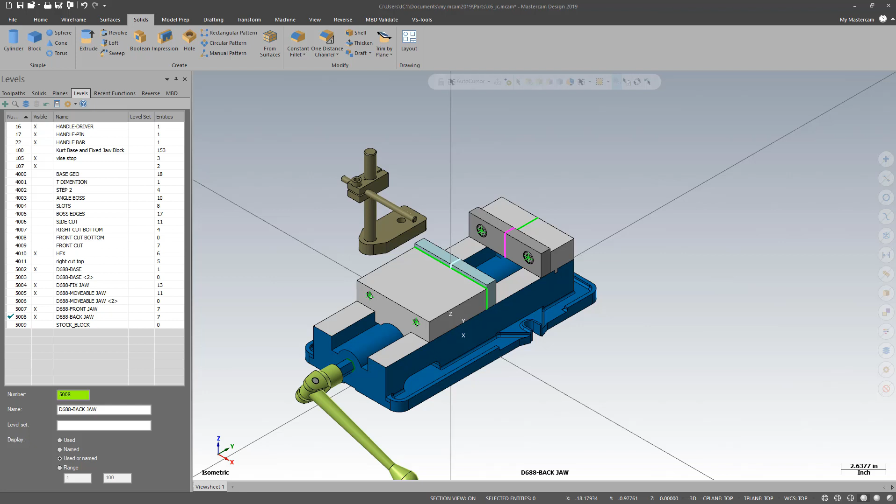Now from here, I'm gonna start bringing stuff. Let's say I'm gonna bring the handle. Just drop it in there. The handle is there. I will say yes. I'm gonna bring a vise stop. I can bring the table. I can bring a lot of stuff, but the video is already way too long. You can add the logo of your company. In this case, I'm gonna bring Mastercam logos in there. Doesn't matter. They were already positioned from another vise that I already have, so we're there.

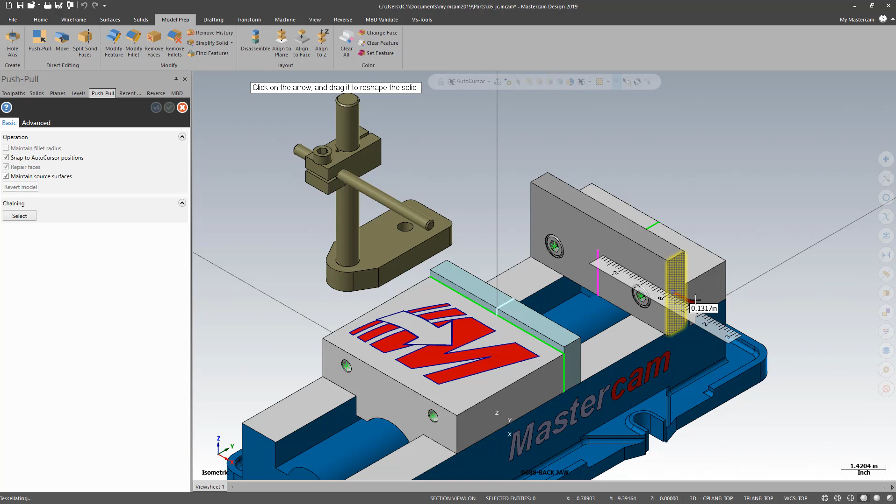I mean, you can do whatever you want, right? Doesn't matter. These are the ones that you're gonna be changing. You can go push pull this way and go that way. It doesn't matter. See, so you can do a lot of stuff from now on. You can move everything to one level.